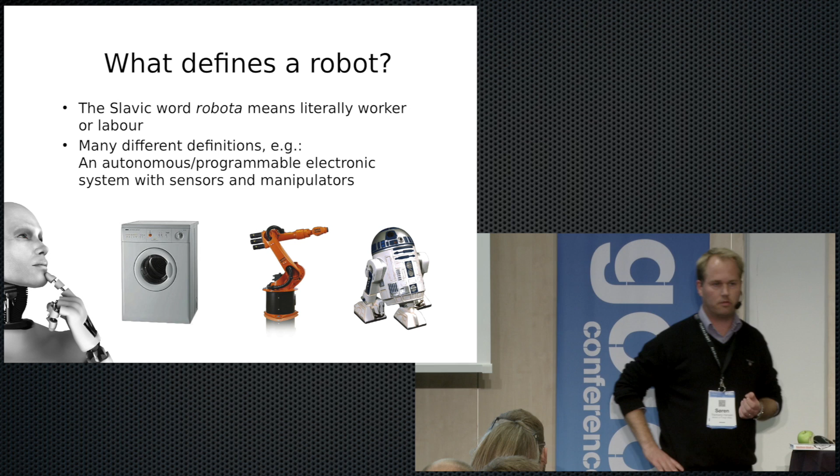So just to zoom out a bit - what is a robot? There's a hundred definitions, a lot of definitions, and depending on what definition you take, you can say your washing machine or coffee machine is a robot because it has some actuators and some programming. The mere fact that we're maybe not talking about the same kind of machine makes this whole area a bit troublesome to make good tools for, because of course it's different if you want to program for this type of robot or that type of robot. They're all robots, but very different devices.

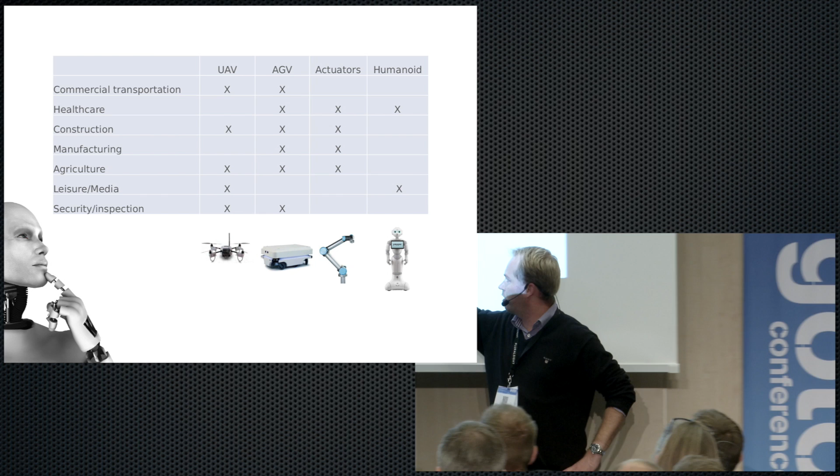And this is just an overview - we have the humanoids and the industrial robots that we saw before, we have logistic robots that drive around, and drones also, applied in different sectors. So it's a very broad range of technologies.

But nonetheless, there's a lot of hype about it, and the amount of robot companies coming out right now is increasing. Some of the traditional IT companies are also looking into this area, most notably Google. So people in the sector talk about before Google and after Google. Before Google went into robotics, it was mostly R&D, some startups, and some big companies like KUKA and ABB. But within the last 5 to 10 years or so, we see companies like Google and Cisco, traditional IT companies, moving into the sector, and that's changing the whole scene a lot.

So if you're an app developer, maybe you should think about robotics also as the next big thing, whatever that is. One funny thing I found out was that Disney is also going into robotics. So what the hell is Disney doing in robots? Let's see now what they're doing.

I actually met these guys who are developing this in Boston last year, and they had a project called Sphero, which is also kind of an app-based robot. They're just young guys, and I don't know how they managed to get a deal with Disney, but it's an app-based product, and they use some of the facilities for augmented reality and voice recording and all that - so it's an extension of a traditional app.

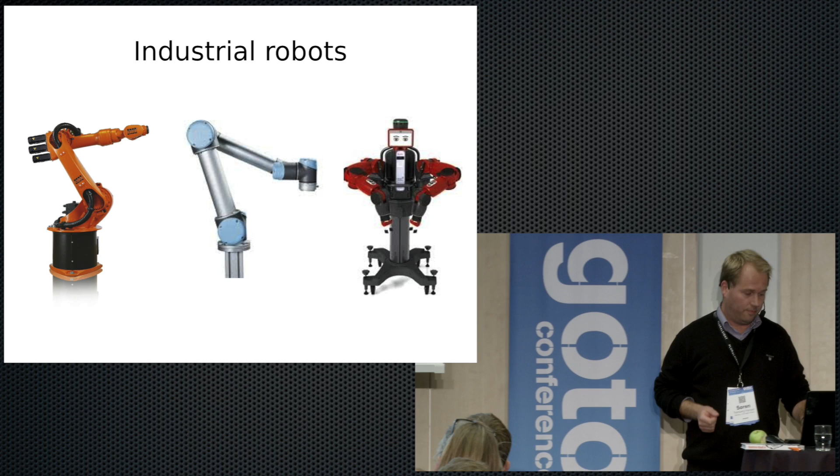These are the traditional industrial robots and universal robots we saw already. And we have Baxter, a 2-armed robot with a head. Yeah, it's not a joke, it's out there as a product.

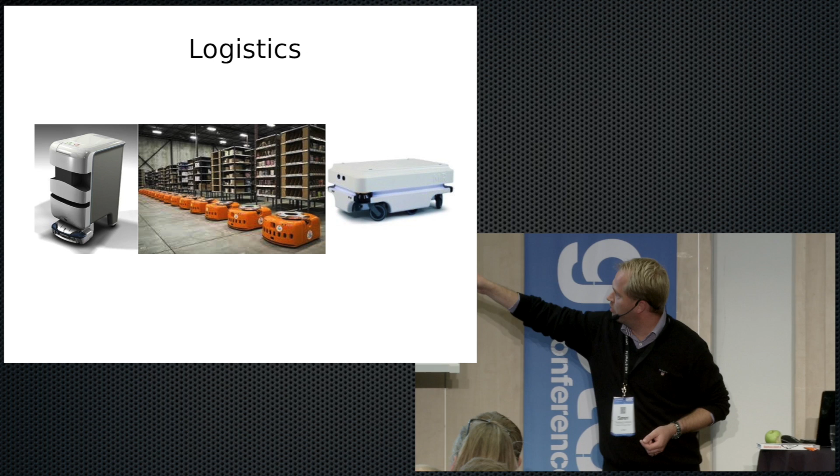And we see it in logistics also, a lot of new transportation robots coming out. This one is a Danish product which is going to be really cheap. And Kiva, a small project that Amazon bought for like $700 million or something.

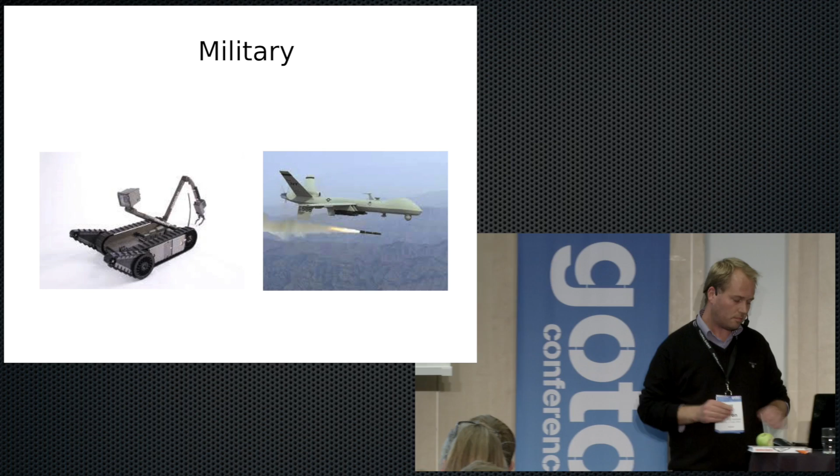And of course military, they're driving a lot of the development, drones and these packbots. So they're pressuring a lot, and they're pushing the technology a lot.

And she's a researcher at MIT, and I guess you followed her also, right? She's been working with this for many years, and now it's a company. But what is it? It's actually a tablet inside a device, and it can move around.

And there is some research evidence that this actually has some effect on people, on the way you perceive it. It changes a lot whether a device can move or not. So that's kind of the effect he's using here.

But so let's see, it's running right now, the campaign. Yeah, so there's a lot of stuff going on in this area.

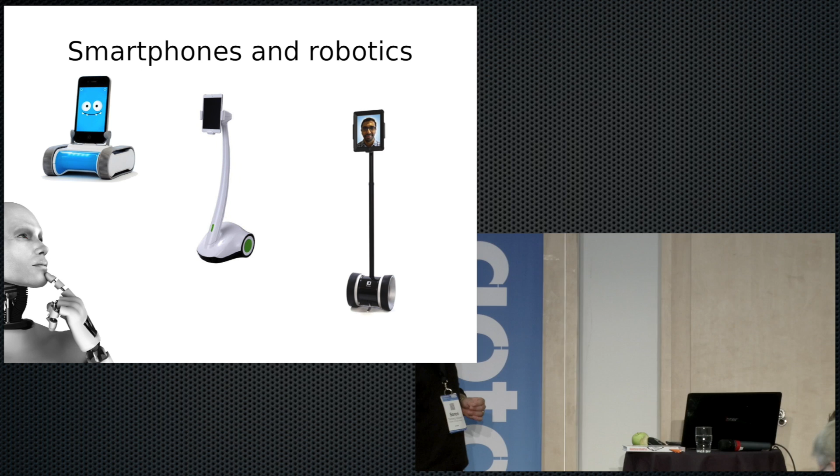So we have one here. It's a telepresence robot. Instead of me coming from Aarhus to Copenhagen, I could just skip that and have the robot run around here. After the session, if someone wants to play around with it for the rest of the day, it's available here. I'm leaving tomorrow, so it's only here today if you want to use it. You could sit in your hotel room and join one of the sessions downstairs. I don't know, it's a possibility.

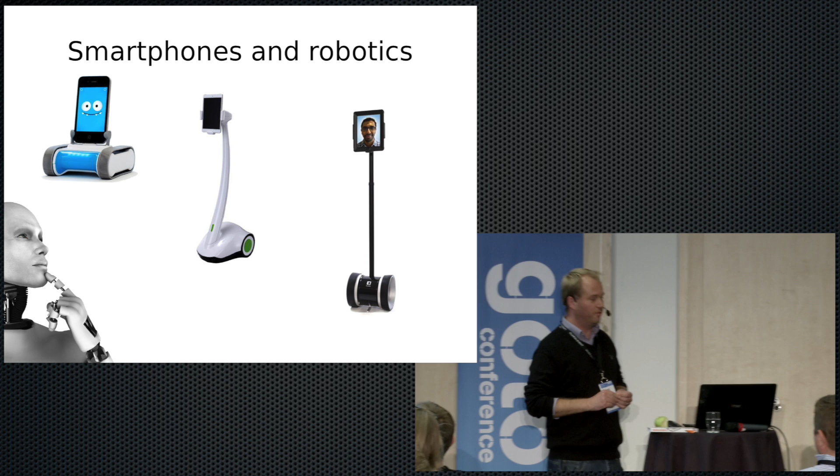And this one in the middle is the new one. This is about $2,200 or something, but this one from China, the middle one, is only about $300. So the prices are really cheap now. Quite impressive. This is a project.

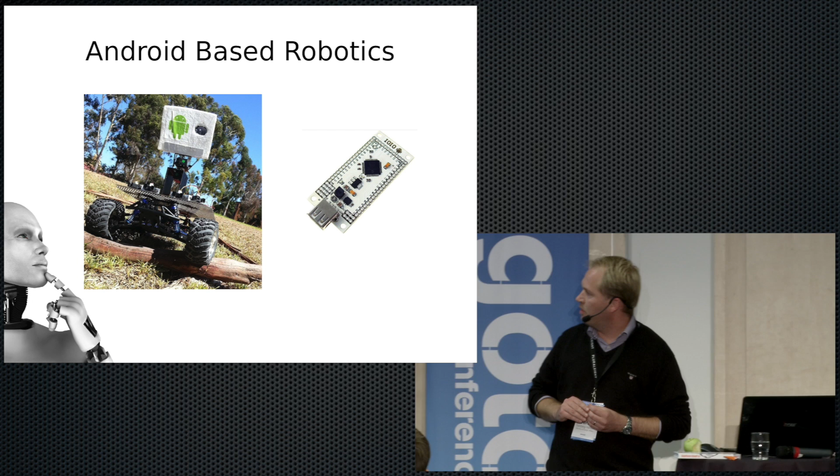Android-based robotics is growing quite a lot right now. This board, the IOIO board, is available in most electronic stores, and it lets you control any device, motors, and everything from an Android phone. There's also a web page, from University of California, I think.

You can Google it and find really easy. There's a step-by-step instruction on how to make a cool robot out of an Android device using this board. So there's plenty of help to get.

I'll just go through some of the really basic theory on robots, because unlike static devices, like a tablet or stuff like that, robots are moving around. And that gives a lot of challenges to how to control it.

There's kind of two basic paradigms: you get some sensor input, then you plan what to do, and then you do it. The classical way is that you have a model of the world, and then you make an optimized plan on what the robot should do.

In the 90s, the perspective changed a bit, so you have more like an instinct reaction. The robot just reacts very fast, has some behaviors that it does. It doesn't have an overview of the entire situation, doesn't have an optimized plan, it reacts instinctively, like these vacuum cleaners - when they bump into a wall, they change direction. That works.

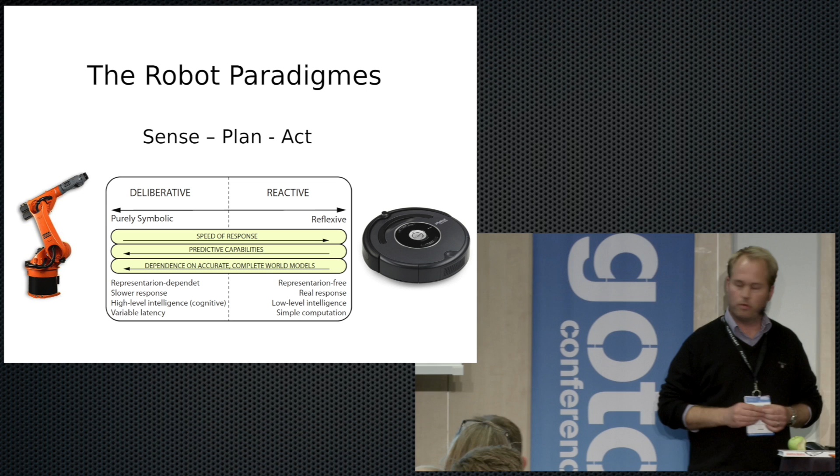The other approach also works, but only in controlled environments, because when you have a moving device with a lot of sensors, you also have a lot of noise. So you don't really know what's coming in, and it's very hard with traditional programming techniques to deal with the sensor input you have to navigate around. So don't mix up traditional programming with robots - it's actually two different things. It's much harder in robotics to make it work. This is a complete research area.

Like you have user interface and human computer interaction, you also have human robot interaction - how to interact with robots, and there's a lot of research on that. But just one basic thing is, how should a robot move around a person? That's actually what I researched way back.

For example, it's very unpleasant if a robot comes in behind you and just looks at you. So how can you avoid that? You need to have an overview of where the people are in the room and how to navigate through these people without them being bothered. Just to manage that is extremely difficult because people are also moving around. So how can you make a decision on that?

So if I should give some advice based on my painfully achieved experience in robotics, it's don't be too over-ambitious. These guys on Kickstarter who want to make a robot participate actively in a meeting and stuff like that, I think that's maybe a bit over the top. Less is more - if they can just make it navigate into that conference room by itself, I think that would be pretty good.